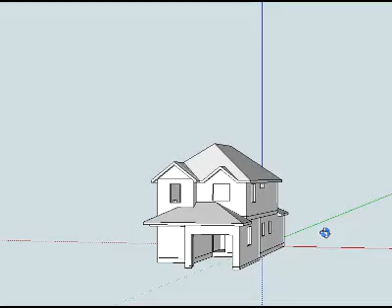Okay, before I went too far and got too much detail on this, I want to make sure we were on the right page. I know I got all the dimensions right, and it's the windows I kind of mainly want to talk about now, and a few other things.

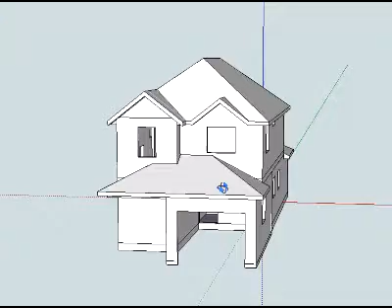One thing is, as near as I can tell, you were at a 9'12" up here, and I believe you had 7'12"s here. I kept that at the 9'12", but I made this a 6'12". Just if you wanted them different, that little bit between 6 and 7 makes it easier to get a window in there and back to get the 4, so I don't get crowded too far over. So that's where I went 6'12" and 6'12" on the lower roofs.

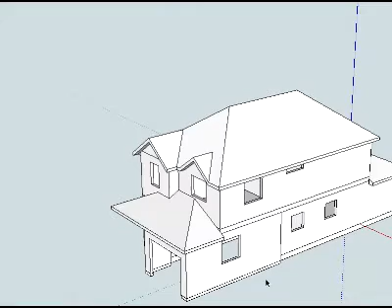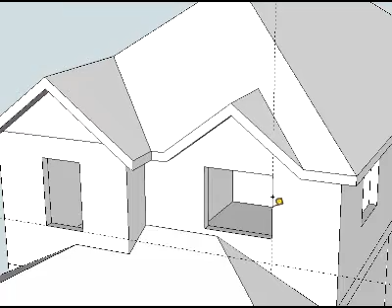As far as windows go, I'll just go through them real quick. Up here, I tried to keep with what you wanted - 2'6" by, I'm pretty sure it's 4 foot. You're real close to something, I think you're 2'8". I tried to keep more like conventional sizes - 4 foot by 3'6" is just all I could get in there.

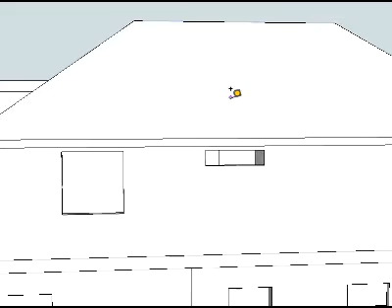4x4, the thing you had drawn in here - we can do that if you want, but it would be pretty costly to have a window up there. It'd be better off if you need to put a skylight in than that gable thing, because these trusses would have to stop on either side of that window, and you'd create a tough little situation there for stick framing the rest of the roof. It can be done, but for that window, it's going to be a lot of extra work.

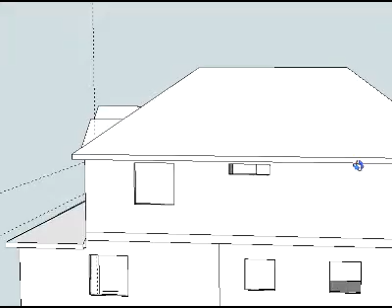Whereas you could - and I just put that right above the tub, that's a 1 foot by 4 foot. And here's your 4x4 in the garage, 3x3 over in the laundry room area, 3x3 over the sink.

I still didn't know what we're going to do - do you just want a 1 foot pop out now for the fireplace?

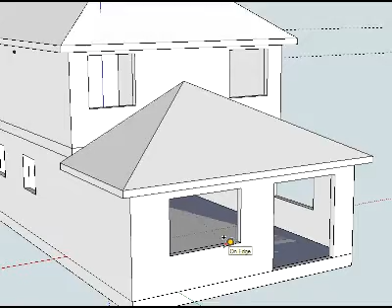I emailed you, you must not have got it. I was kind of waiting until after the weekend to - if I didn't hear from you, then I was going to call it. I didn't want to, thought maybe you were out of town or something.

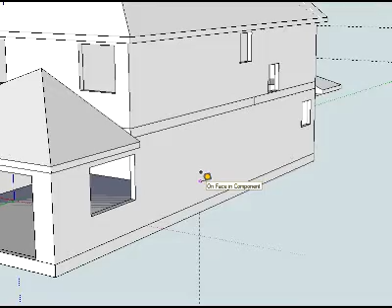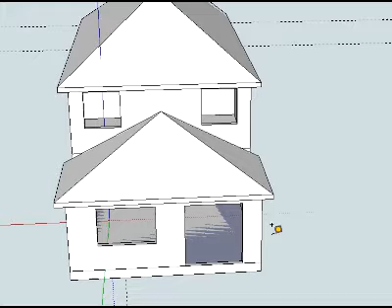And this 6x4, 6x6, I kept this one where it was at, but again I need to hear from you - did you just want to do like a straight 1 foot pop out here? I wouldn't bother with the angled if you can only come out 1 foot. The other thing to think about, if you're saying you have 1 foot to spare on each side, you might think about which one you want more and move the house over a foot - let's say you didn't have the fireplace but had the pop out, or move it this way and not have the pop out and have the fireplace.

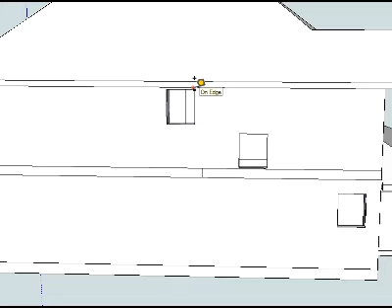But then these windows - what I did here, I just made a line basically from this. The one down below is centered in between the stairs and the exterior wall, and then this one is centered in the upstairs landing, so this is in line with those two, is all that it is, why I put it there. You really don't want to get it dead smack in the middle, you'd be into the joist, and this is already going to be a tall wall right there. I'm pretty sure you don't want to cut that into the joist, and you don't necessarily need that - you can just get nice lighting in the stairwell too.

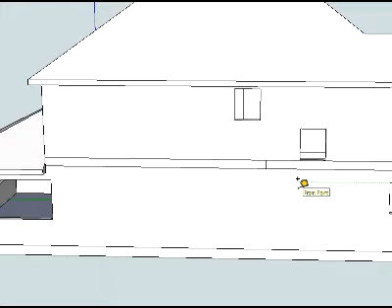It wouldn't. It's just that this is a big tall wall, and you're going to be putting a hole right in the middle of it. Then I know you got one more window under the stairs here, which I haven't put in yet.

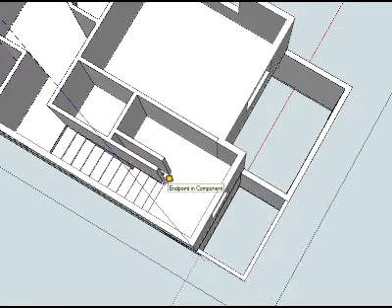Again, like I said, I hadn't added a lot of the detail, because if I got to move walls around and whatnot, it just gets in the way. So this in here, you had a funny thing where this was open down below to the stairs, to like here. And I can tell you realize you're going to have a real funky deal with your cabinets, because you got 5 feet, and then the ceiling has to drop down below at that point, so basically your entire bottom of your cabinet is going to be cut in half.

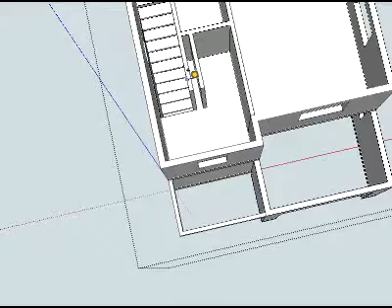But the reason I didn't make this jog in the floor below is because of the joisting. You've kind of created something that can be done if that's really important to you. I'll show you in a second what I did to the stairs, but you're better off even having this—you'd make this cabinet depth. You push this wall back to cabinet depth, and then there'd just be a wall right there.

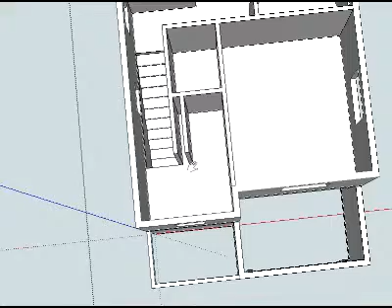So it's because of joisting why I didn't include that. I don't know that they would add that much to just have that section down below open right there. Then the rest of this, though, I think is all basically what you drew.

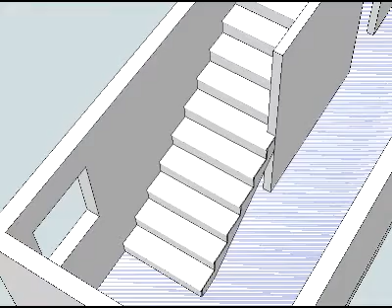Let's look at the stairs, so we can see what the joists are going to run. This is going to be a bearing wall right to here. The joists will run over here and across the top of the garage. And where we have to have that 5 feet in from here, there'll be a doubled up joist across there, and then there'll be a header running from there to this other joist I have here.

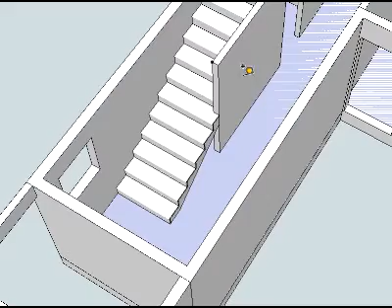And if this is open, we can still do it. This last joist here, 5 feet, we can double it up and then make this a header as well, and then just put your opening back here. So it's definitely doable, but this is pretty nice and open as is.

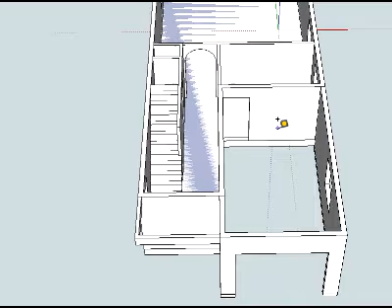And because this is an all open room, my thought is to make this a header across here, this bearing wall. While these joists are all going to run this way on the second floor, these joists have to run from here out to the carrier truss. This last truss you have here is called a carrier truss, and all these joists can hang off of that carrier truss. That's why you're better off having this beam down below the floor joist, in case they need to run ducting through it or something.

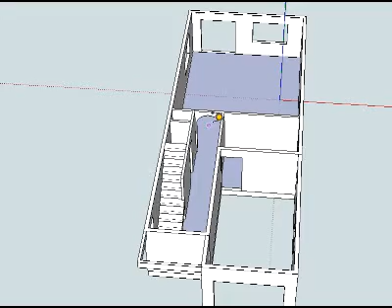When you put a header up in here, which you can, you don't have to have that—you can make it the header up inside of the floor system. It's just a little harder for them to get around if they got to run heating in there. But that's something you can decide later.

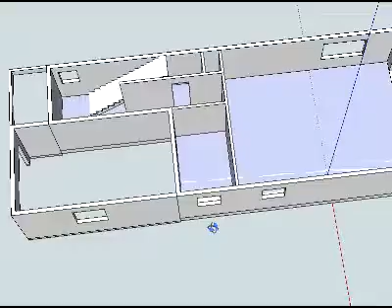The one other thing—the way you had it drawn, you had this area as a part of the garage, where it's a laundry room, I believe. It really needs to be heated space, so it should be a part of the house. So anyway, that gives you plenty to look at.